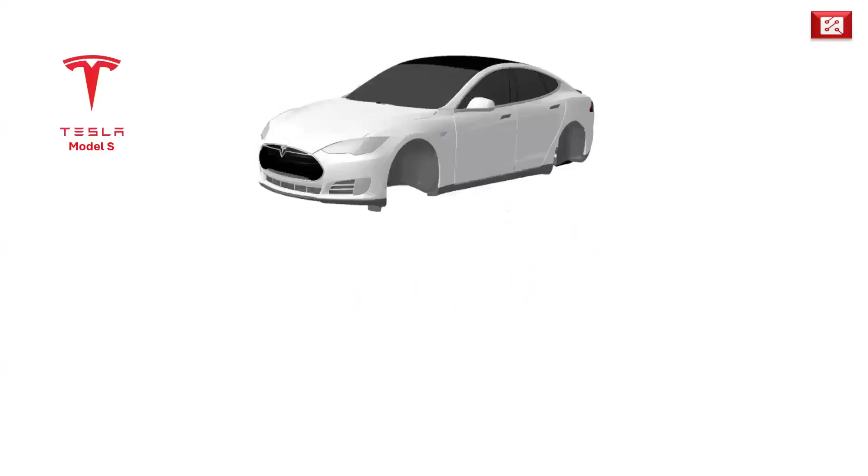Made primarily from lightweight aluminum, it's designed for both strength and aerodynamics. Every curve and contour reduces drag, improving efficiency and range. Inside, Tesla combines minimalism with cutting-edge technology, from the massive touchscreen to its advanced autopilot sensors. The body isn't just about looks. It's a key part of the car's energy efficiency and safety.

Next, the drive unit, the heart of Tesla's performance. This unit combines the electric motor, inverter, and gearbox into a single compact system. The result? Instant torque, lightning-fast acceleration, and near-silent operation. Depending on the model, the Tesla S can go from 0 to 60 miles per hour in as little as 2.1 seconds, faster than many supercars.

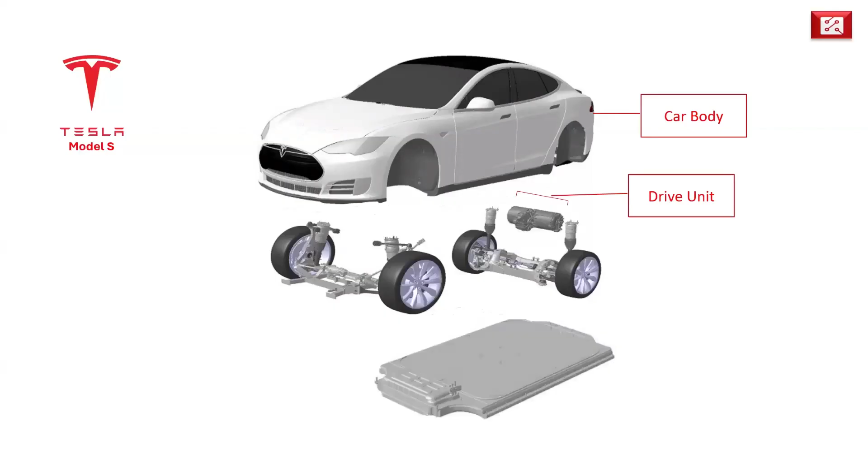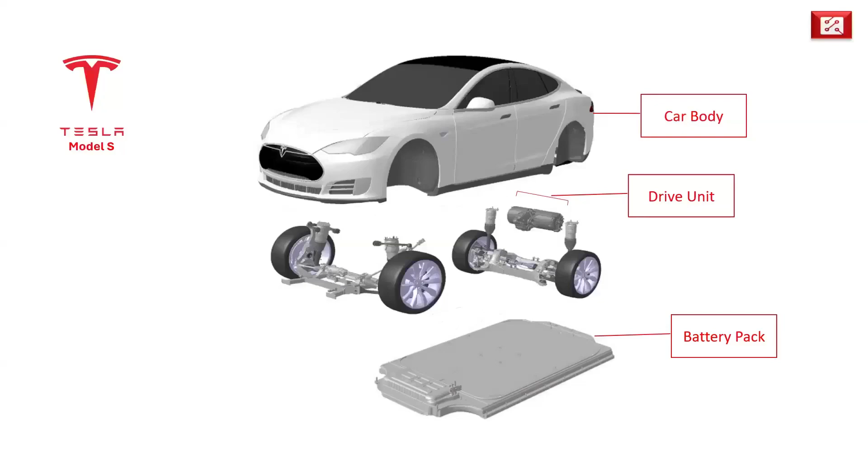And finally, the battery pack, the real powerhouse. It sits low beneath the floor, giving the car a low center of gravity for better handling. Inside are thousands of lithium-ion cells working together to deliver a range of up to 840 kilometers on a single charge. Tesla's thermal management system keeps the battery at the perfect temperature, ensuring both safety and longevity.

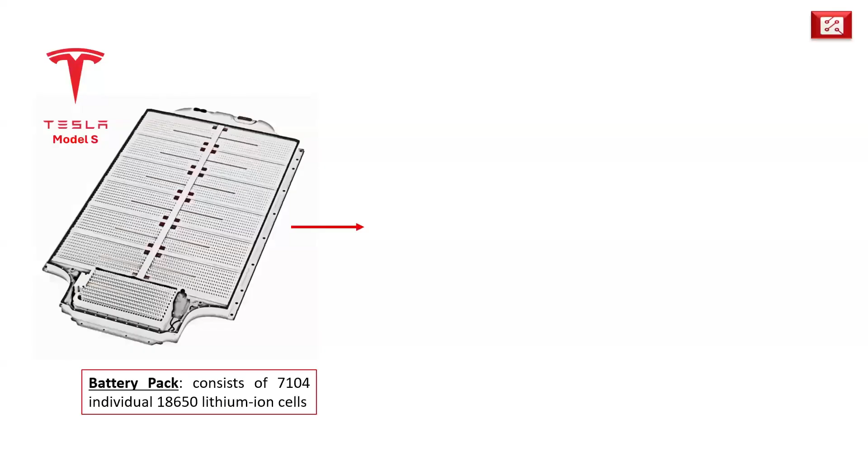The Tesla Model S battery pack is made up of an incredible 7,104 individual 18650 lithium-ion cells. These cells are not all connected in one massive assembly. Instead, the pack consists of 16 identical battery modules, making it easier to manage, cool, and maintain. Each module contains 444 cells, arranged in a 74 parallel and 6 series configuration.

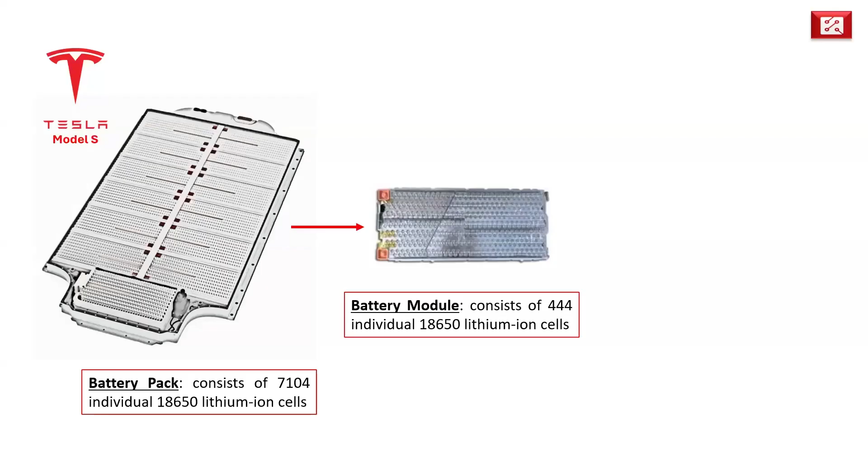74P6S configuration. This clever design allows Tesla to achieve the desired voltage, capacity, and thermal balance needed for high performance and long driving range. Through this modular approach, Tesla ensures that the battery pack delivers both power and reliability, while also simplifying manufacturing, testing, and serviceability. A true example of engineering excellence in electric vehicle design.

Tesla uses 18650 Li-ion cells manufactured by Panasonic for their Model S and Model X variants of cars. The battery cells used in the Tesla Model S are called 18650 cells, and here's what that name actually means. These cells are cylindrical in shape, and each one measures about 18 millimeters in diameter and 65 millimeters in height. So the name 18650 isn't random. It's a simple code that tells you exactly those dimensions.

If we split the numbers into 3 parts, the first 2 digits, 18, represent the diameter in millimeters. The next 2 digits, 65, represent the height in millimeters. And the final digit, 0, tells us that the cell is cylindrical in shape. So whenever you hear 18650, you're hearing the cell's size and shape built right into its name: 18 millimeters wide, 65 millimeters tall, and cylindrical. It's a simple naming system, but it's what helps engineers around the world quickly identify and design with these cells, the tiny powerhouses that drive the Tesla Model S.

Each 18650 cell inside the Tesla Model S might look small, but it's packed with a remarkable amount of energy. Let's break down what one of these tiny cylinders can actually do. It has a nominal voltage of about 3.66 volts, a capacity of 3.4 ampere-hours, and that gives it an energy content of roughly 12.4 watt-hours. That's about the same amount of energy it takes to power a 12-watt LED bulb for 1 hour.

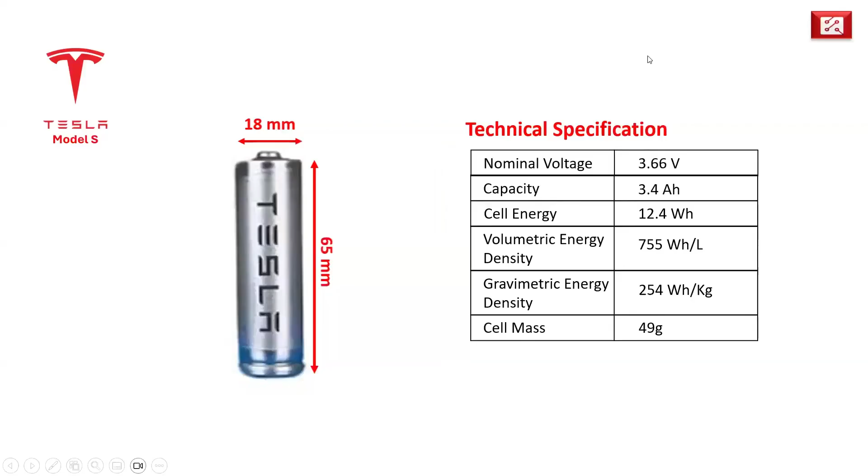Each 18650 cell in the Tesla Model S has a nominal voltage of about 3.66 volts. That's great for a single cell, but not nearly enough to power a car. So how do engineers increase the voltage?

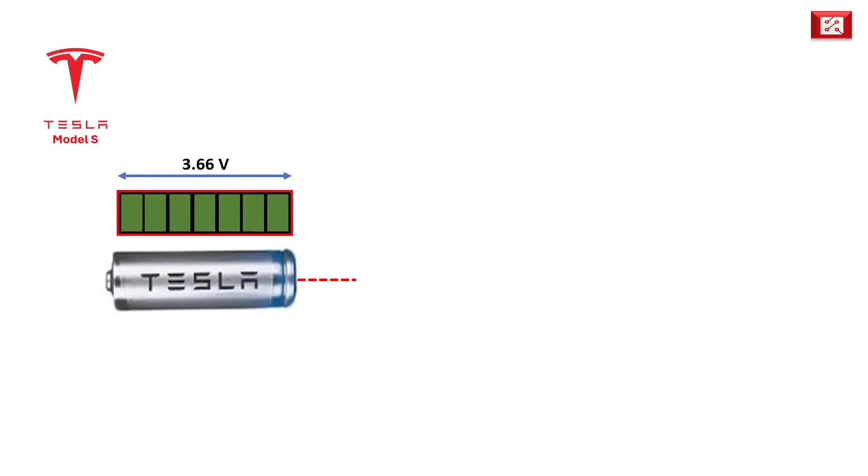By connecting cells in series, end to end, just like stacking batteries in a flashlight. When you connect two cells in series, their voltages add up. So instead of 3.66 volts, you now have 7.32 volts. And if you connect a third cell, the voltage rises again: 3.66 volts times 3 equals 10.98 volts.

This is the basic principle behind every battery pack. By connecting multiple cells in series, Tesla can build up the high voltage levels needed to power the motors efficiently, while still using tiny, standardized cells. So by simply linking more cells together, we can go from a few volts to hundreds of volts, turning small battery cells into the powerful energy source that drives the Tesla Model S.

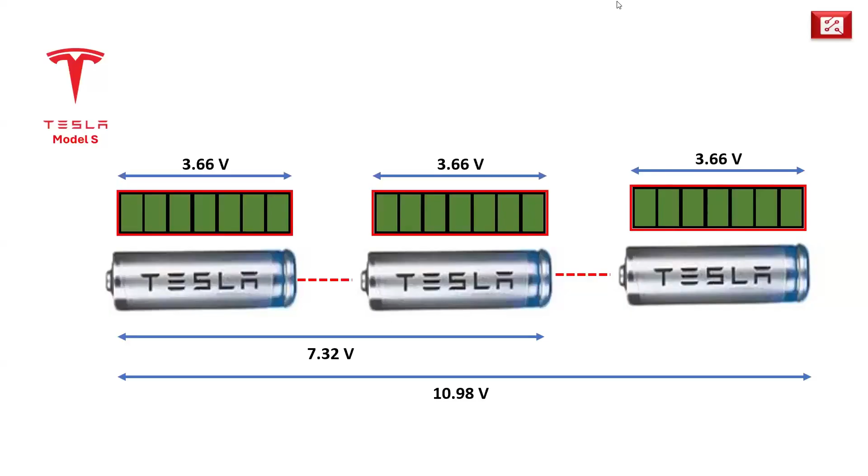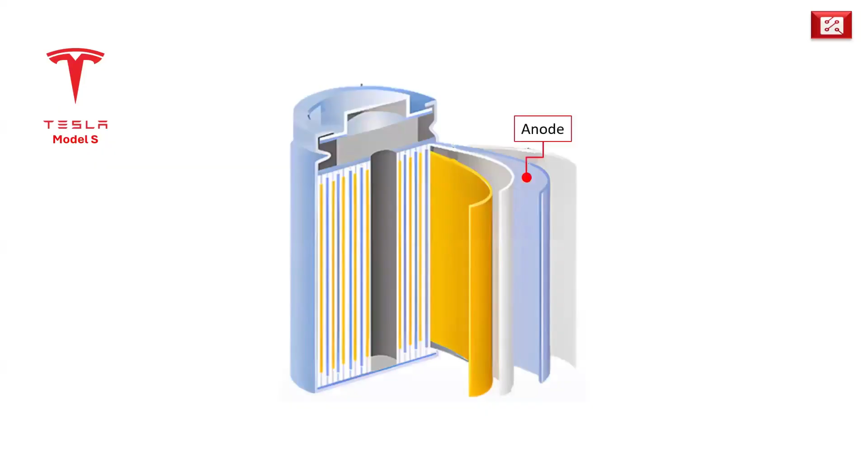Inside each 18650 cell, there's a lot more happening than meets the eye. What looks like a simple metal cylinder is actually a highly engineered electrochemical system, carefully designed to store and release energy safely and efficiently. At the heart of the cell, we have two main components, the anode and the cathode.

These are the negative and positive electrodes, and they're separated by a thin microporous separator, which prevents them from touching while still allowing ions to pass through during charging and discharging.

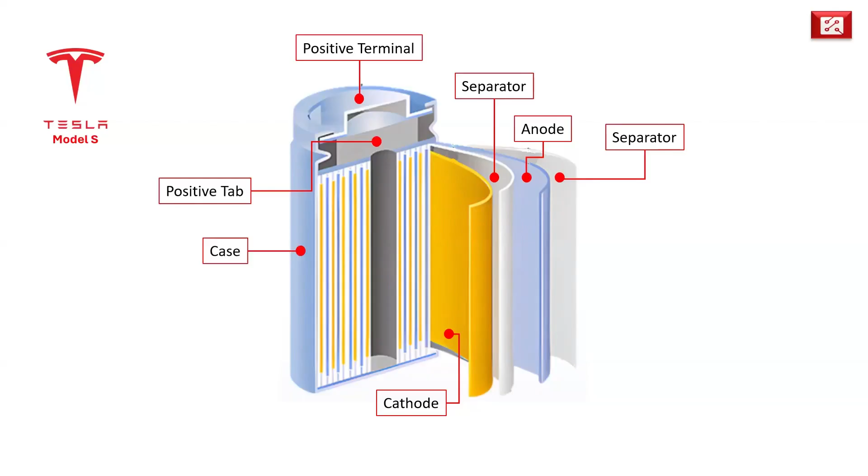At the top, we have the positive terminal and the positive tab, which connect the cell to the rest of the battery module. The entire assembly is enclosed within a metal case, usually made of steel or aluminum, providing both mechanical strength and protection. And at the base, there's a bottom insulator, which keeps the internal components electrically isolated from the outer casing, ensuring the cell operates safely under all conditions.

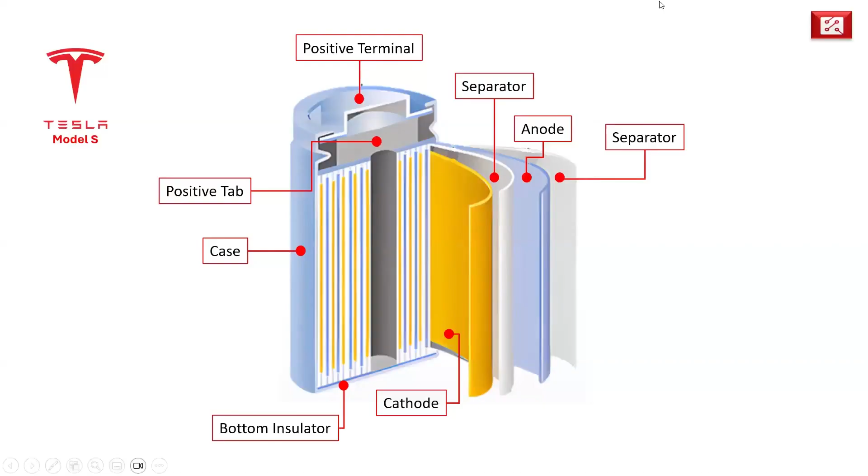All of these layers, the anode, separator, and cathode, are wound tightly together in what's called a jelly roll structure, maximizing the surface area and energy storage within that small cylindrical shell. So even though the 18650 cell looks simple from the outside, its internal structure is a masterpiece of precision engineering, carefully designed to deliver high energy, high safety, and long-lasting performance in every Tesla battery pack.

Each Tesla Model S battery module is made up of 444 individual lithium-ion cells, carefully connected to deliver both high energy and high power. These cells are arranged in what's called a 74P6S configuration.

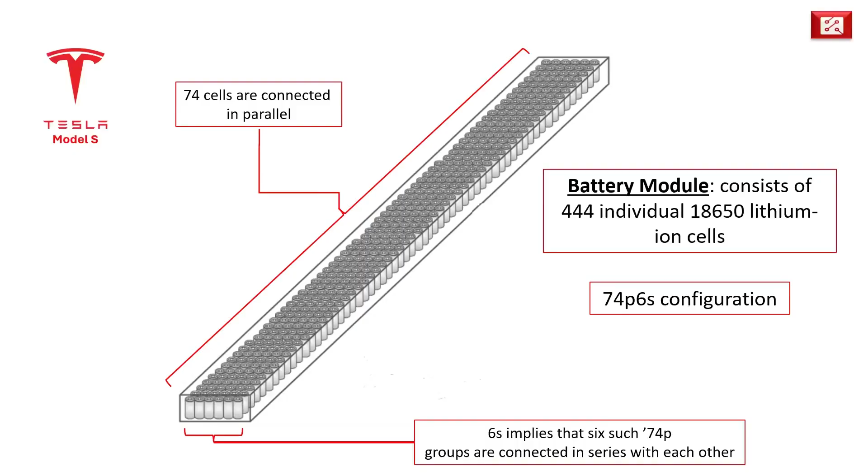Let's break that down. The 74P means that 74 cells are connected in parallel, side by side, to form one group. When cells are connected in parallel, their voltages remain the same, but their capacities add up, allowing the battery to store more energy. So in total, you have 6 series groups, each containing 74 parallel connected cells, making up 444 cells per module. This smart combination of parallel and series connections allows Tesla to build battery modules that are not just powerful, but also efficient, safe, and perfectly balanced for the performance demands of the Model S.

In a parallel connection, the voltage of the configuration remains the same as that of a single cell, but the capacity increases because the cells share the current load. Since each 18650 cell in the Tesla Model S has a nominal voltage of 3.66 volts, a 74P grouping, that is, 74 cells connected in parallel, also yields a total of 3.66 volts.

Now, when we move to a series connection, things work a bit differently. Here, the positive terminal of one cell connects to the negative terminal of the next cell, and the voltages add up. So when 6 of these 3.66-volt parallel groups are connected in series, the total voltage becomes 22 volts.